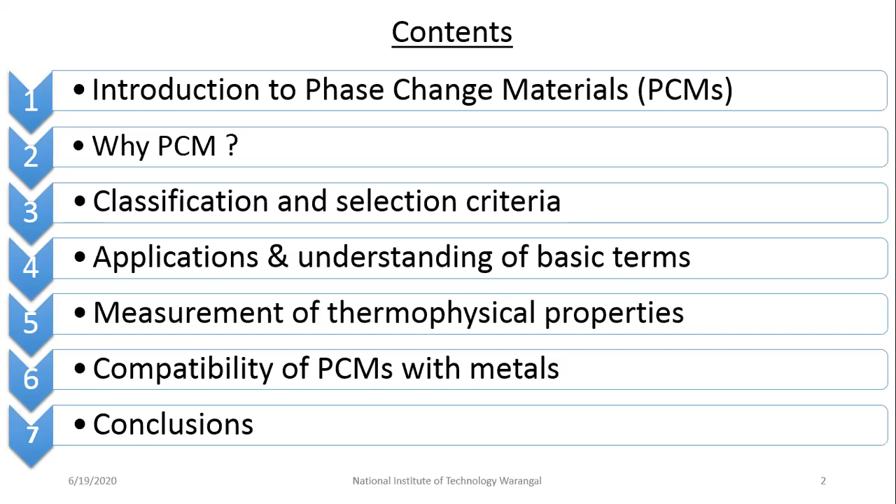If you see what phase change materials are, the name itself is the abbreviation - PCM. It is a substance which releases or absorbs sufficient energy at phase transition to provide useful heating or cooling. For example, take ice that we generally see from childhood.

If you keep ice outside at one particular temperature, initially it may take some time. Then slowly water comes out and its volume shrinks. That is our melting process. The name itself tells you - if a material is storing or releasing heat and undergoing a phase change, you can call it a phase change material.

Initially there will be sensible heat. Ice at minus 10 degrees centigrade absorbs heat from the atmosphere and changes to ice at 0 degrees centigrade. So minus 10 to 0 degrees centigrade is sensible heat, which we denote as MCP delta T.

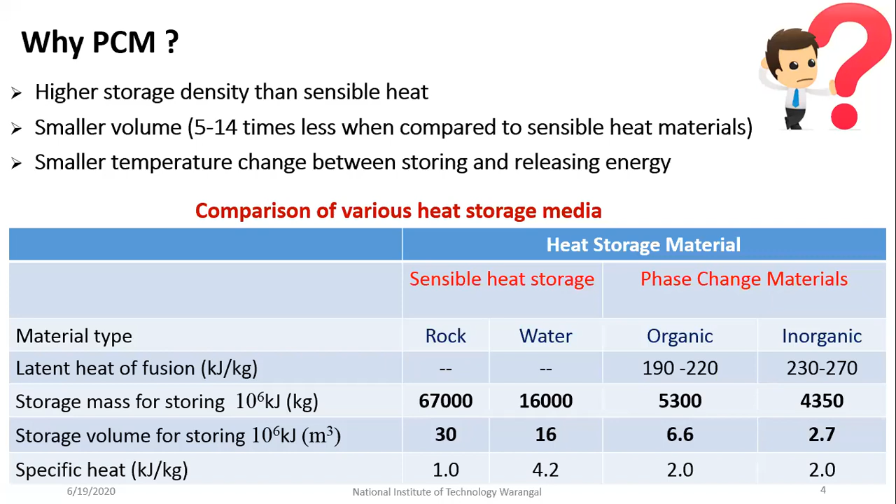If you see the basic classification of phase change materials, it is broadly classified into 4 types: gas-liquid, solid-gas, solid-liquid, and solid-solid phase change materials.

First, let's discuss solid-solid. You might be wondering, how can there be a solid-solid phase change material if no phase change is taking place? The point here is the solid phase change material changes from one crystalline structure to another crystalline structure. For example, PEG 6000, PEG 3000 - different materials exist. We call this a shape-stabilized PCM. It is not going to convert to a liquid state, but will remain in solid state. What happens is once it takes a particular amount of heat and attains the phase transformation temperature, it changes from one crystalline structure to another.

Now let's go back to the other three types: gas-liquid, solid-gas, and solid-liquid. Take water as an example: solid-liquid means water converting to ice. Gas-liquid means, for example, vapor converting to water. And solid-gas - we have several examples like naphthalene balls that we use in daily life, and camphor.

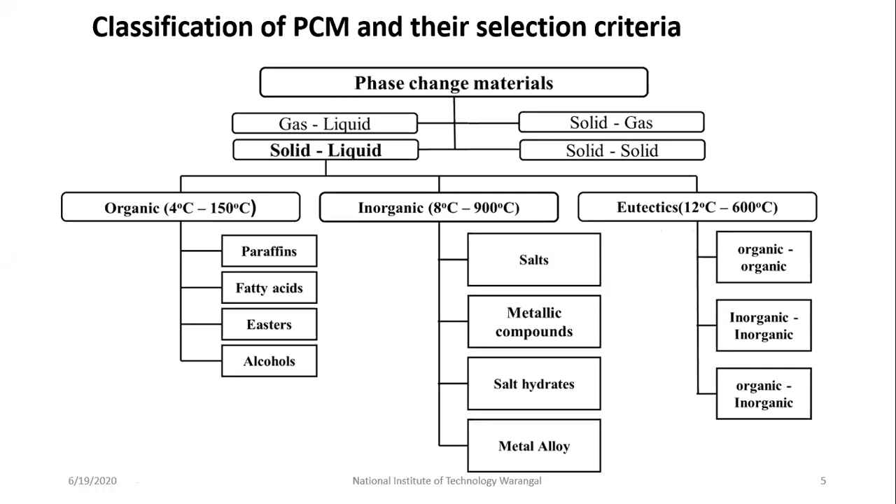Now, obviously PCMs are very promising, but there are several problems that make research difficult. So let's see their merits and demerits.

If you take organic PCMs, generally they have a wide range and good compatibility. What do I mean by compatibility? It means the PCM should be kept in some container, and it should not corrode or eat away the container material. That's what compatibility means.

It should be chemically stable, meaning its thermophysical properties should not change over time. Generally, organic PCMs have relatively high latent heat of fusion. They are also safe, non-reactive, and recyclable.

The main disadvantage of organic PCMs is low thermal conductivity. Volumetric latent heat storage capacity is also low compared to inorganic PCMs. Another problem is that at higher temperatures, some organic PCMs are flammable, and they are a little more costly compared to inorganic PCMs.

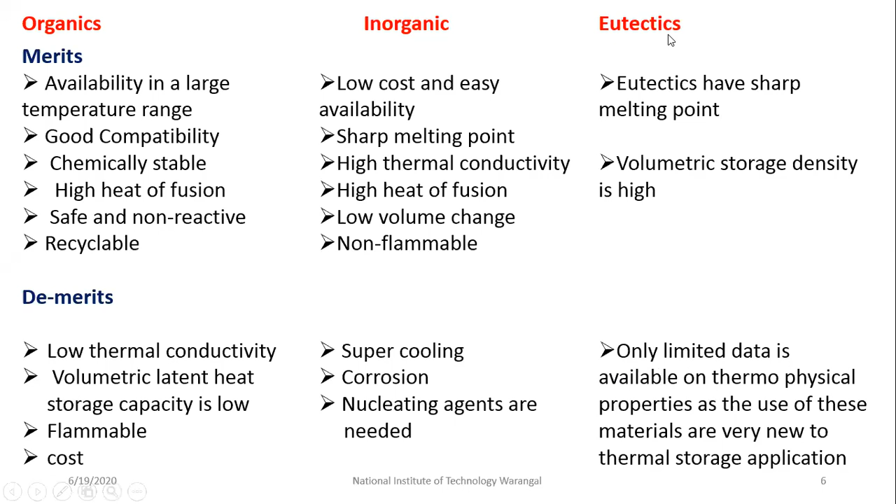So now the point is, if you just Google phase change material, you'll get hundreds of phase change materials. The question comes: what material should I take? How should I select from those hundreds of PCMs? Even review articles on phase change materials give you a huge list that keeps going on. This is one of the major confusions most researchers have when starting PCM work.

First and most important, say I have an application - I want to work on thermal management of electronics and maintain the heat sink or thermal equipment temperature around 40 degrees centigrade. So what should happen? I should select a PCM which has a melting point in that particular range, something like 35 to 38. So the first and most important property for PCM selection is that the melting point should be in the temperature range of the application.

The next most important thing is high latent heat. So you can shortlist some PCMs which have a melting point in the application temperature range.

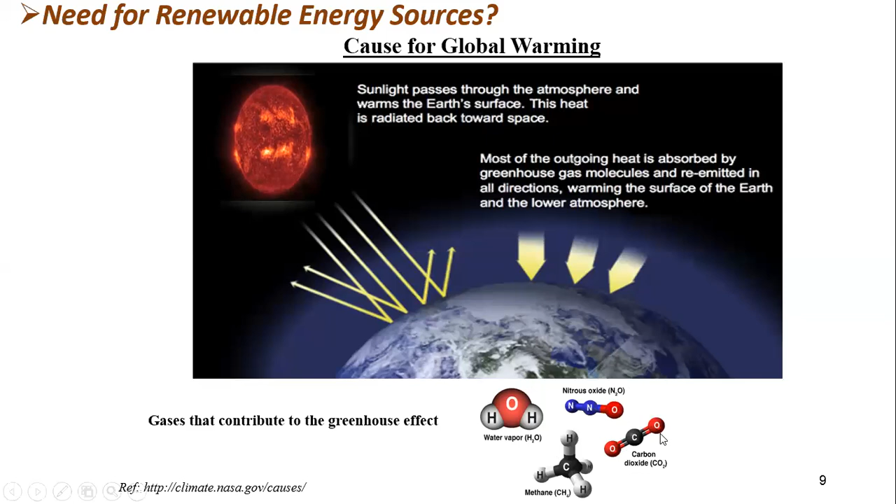One more thing is that we have so many greenhouse gases which cause global warming: methane, carbon dioxide, nitrous oxide, NOx, sulfur dioxide, and water vapor. But every time we project things only about CO2. Why? Because out of all the various greenhouse gases, carbon dioxide contributes 60% of whatever global warming we are having. That is why simply if you say greenhouse gases, we directly project only carbon dioxide, because it contributes 60% of the greenhouse gas emissions.

The question comes: there are a few studies which mention it is a tendency of the earth itself to raise its temperature, and automatically it is a cycle, this temperature will come down. But researchers have done some study and tried to relate the CO2 level that we are having in our atmosphere versus temperature. The temperature of the earth is increasing, and based on this only, people could conclude that because of the CO2 rise, meaning the ppm level of CO2 increase, the temperature is getting increased. So this is one of the proofs.

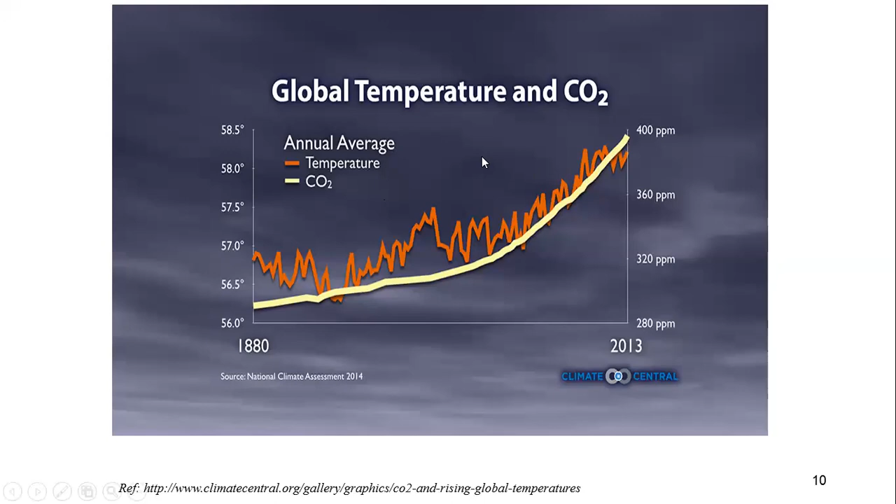So now the question is, why don't we go for other renewable energy sources that we have? Why only solar? If you see some facts, the annual solar energy reaching the earth is around 1.5 into 10 power 18 kilowatt hours.

Based upon this energy consumption data—actually this is old, but I was not having any reliable data, that is why I kept it just to have some comparison—we require around 1.5 into 10 power 14 kilowatt hours. So if you compare this, if you are able to tap 0.1% of the incoming solar radiation, that will satisfy our needs. Maybe presently it can be slightly higher, maybe let us take some 0.2% or 0.3%.

But whatever energy is released by the sun, not everything falls on the earth. Because of reflection and absorption by the atmosphere, the solar irradiation falling on the earth under ideal conditions is around approximately 1 kilowatt per meter square.

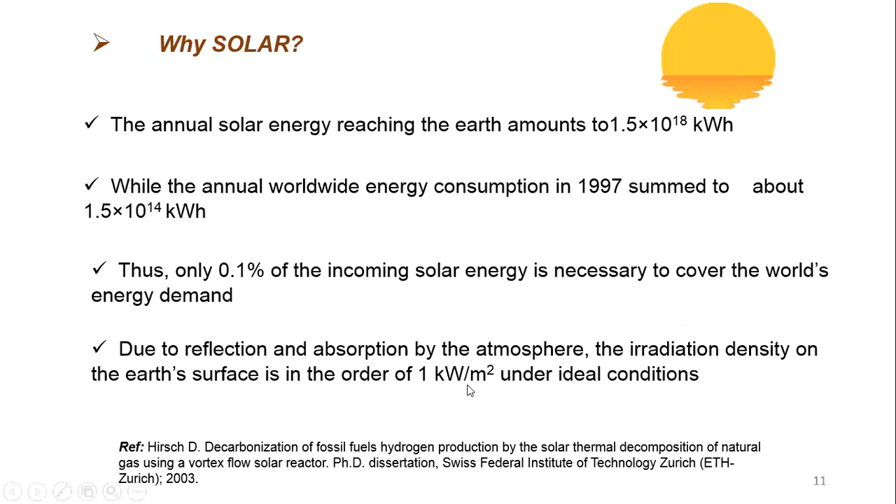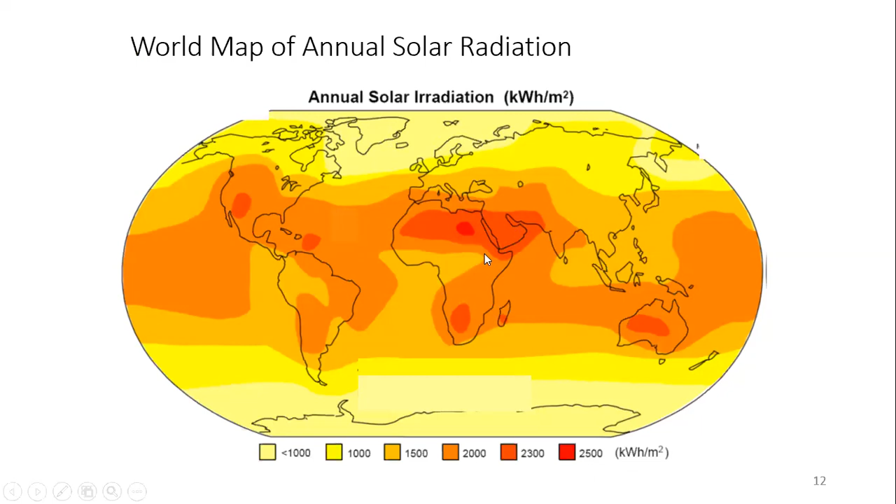Now if you see this solar radiation map, this is annual solar radiation data. You can observe throughout the earth it is not the same. In certain locations, there is a huge amount of solar radiation available, and in certain portions it is diluted. Based upon the contours, we can approximate what its value is. If you see the Indian context, to be very frank, India is blessed with good solar radiation. We have around 300 sunny days on an average basis.

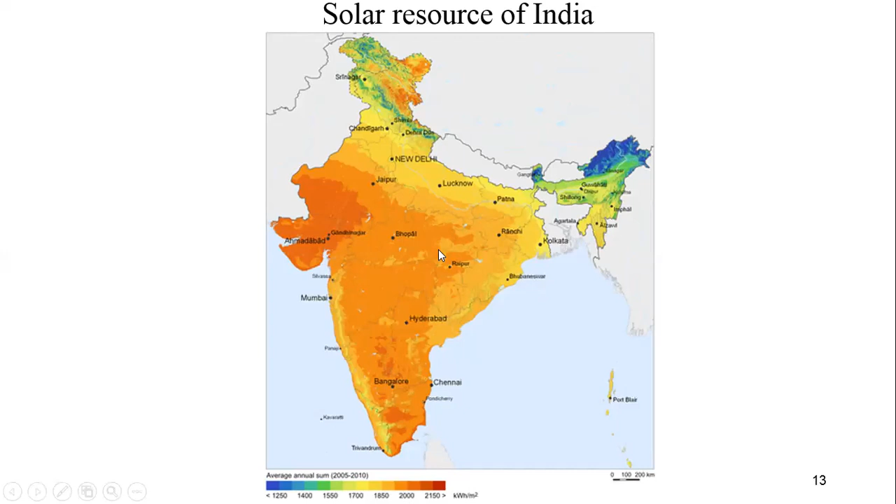So if we effectively tap this, we can reduce several emissions also. This radiation is not uniform; there is a distribution of it. Now the point is, why are we not able to effectively use this solar radiation?

The power density of solar radiation reaching the Earth's surface is low. That means whatever density you have, you cannot directly convert it to steam or directly run a turbine. So it needs to be concentrated, since it is in a diluted form.

There is also a temporal variation in whatever solar radiation we have. That means especially in monsoon, there will be several passing clouds, and there is daily variation too, right from morning to evening, and obviously depending upon the seasons it will change. One more difficulty is if you take somewhere in Europe, you can hardly get solar radiation. So throughout the Earth, you have unequal distribution on the Earth's surface.

So how to overcome this? There comes the question. One thing is that as the power density is low, we can use concentrators to effectively tap it. Next, because there are temporal variations—seasonal variation, hourly variation, and so on, or due to weather conditions—we need to have a very good storage medium and conversion system.

Another thing is, especially in the Middle East and India, there is huge solar radiation, that is solar resource available. But then what about countries like those in Europe, few countries where we hardly get any radiation?

So what you do is convert that thing to some transportation fuel, like hydrogen production and so on, and supply these fuels to that particular place. That means you are effectively tapping solar energy.

Now, if you take the mean annual solar radiation of 1700 kilowatt hour per meter square and a collector efficiency of 5%, you need an area of 1100 by 1100 kilometer square. That comes to around 2.4% of the Earth's surface area and 8.1% of the total land surface area that we have.

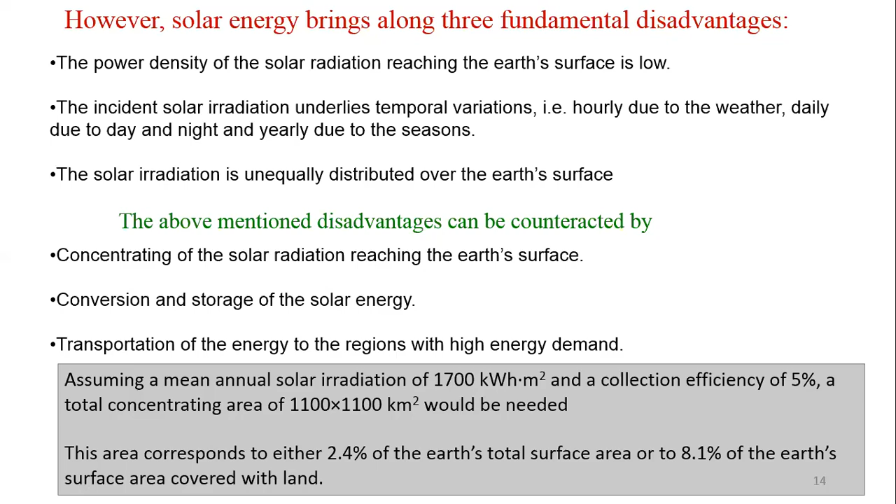So now, how can we utilize solar energy? One thing is photovoltaic panels, which make use of solar cells and directly convert to electricity, used through distribution lines and so on.

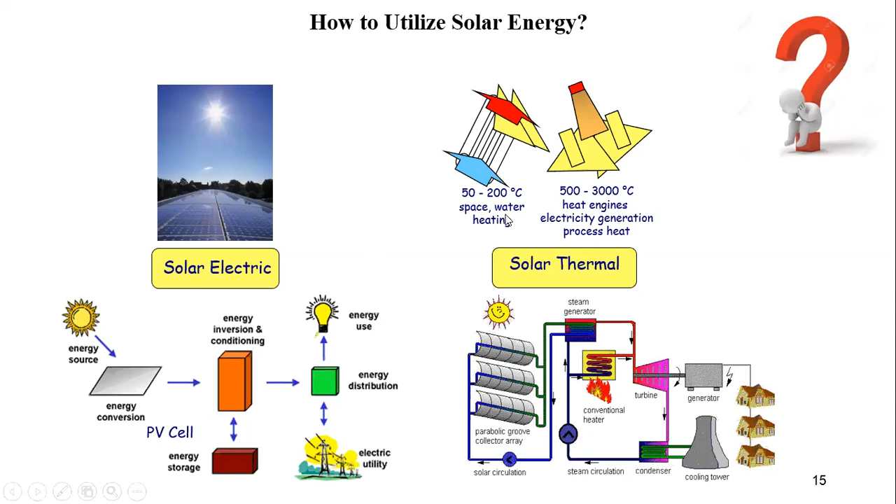Another thing is you use solar thermal devices. A lot of work and research was done especially on this, and especially for the past 2-3 years, a lot of research is being done on this solar thermal area. So we are going to concentrate on these things to understand the various thermal systems. Usually depending upon the type of device, you can have different temperatures.

One more important aspect: since we are talking about pollutants and so on, if you take most industries, 74% of the industrial energy consumption is used to meet the process heat demand, so only 26% is electrical energy. Even within this heat demand there is variation: low temperature around 22% is used, 100 to 400 degree range 16% is used, and high temperature heat around 36% is used. Why? Because if we know these things, depending upon the temperature range, we can appropriately select different types of PCMs or applications or thermal devices.

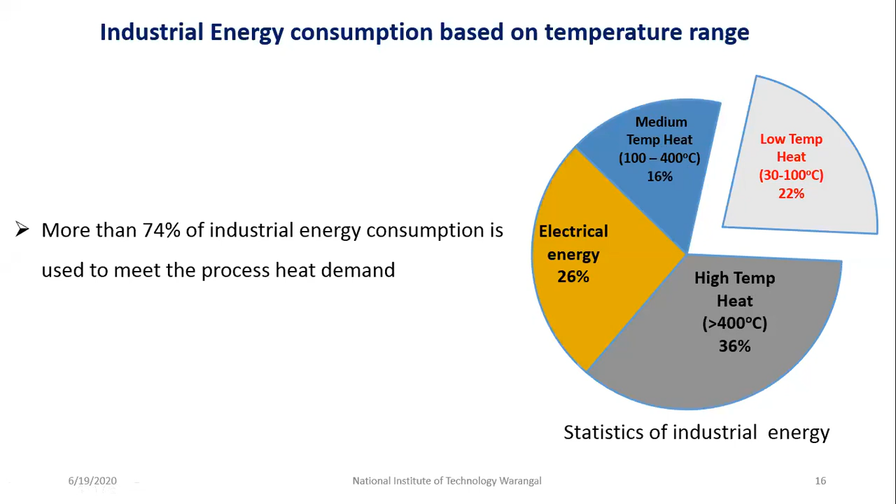So what are the various thermal devices we have? You can broadly classify them into stationary, single axis, and biaxial tracking systems. There is one more thing called the concentration ratio, defined as the aperture area divided by the receiver area. It is also called the geometrical concentration ratio, and you can also call it suns, or number of suns.

If you take the flat plate collector that we have in our water heating system, its concentration ratio is 1. The average temperature you can attain with this is around 30 to 80 degrees centigrade. This understanding is very important for selecting any PCM or application.

If you take the evacuated tube collector, because we are reducing convection loss, you can attain relatively high temperatures. And this is a compound parabolic collector—depending upon the concentration ratio, you can even attain around 300 degrees centigrade.

With the Fresnel reflector, it is in tubular form because at the focal point you have a tube where the radiation gets concentrated, and through heating oil you can tap this heat energy. With this you can attain 250 degrees centigrade.

Another thing is the parabolic trough collector, which we can also call a line focusing collector. You can attain nearly 300 degrees centigrade with this.

Then you have the parabolic dish, which is a biaxial tracking system. Here the concentration ratio can be increased. Obviously, once the concentration ratio is increased, the complexity and cost for the structure and everything increases. You can attain nearly 500 degrees centigrade with this.

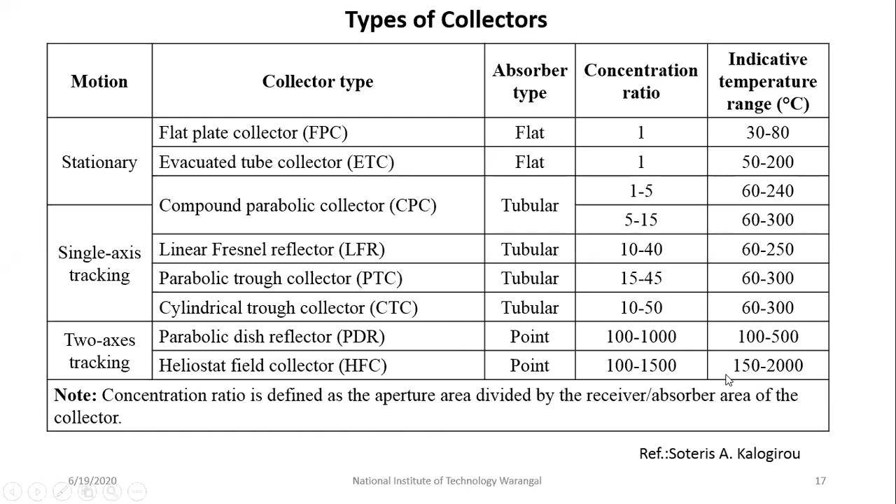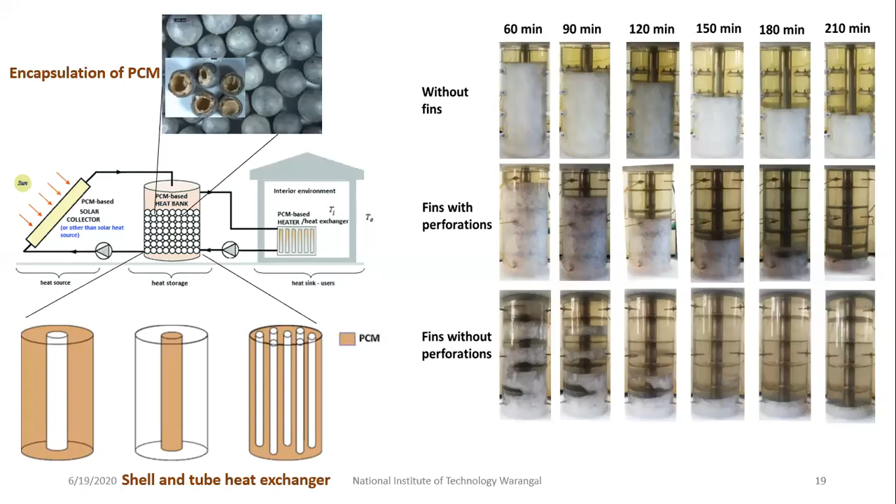So now the question is, I want to use PCM. This is one of the papers which I published in Journal of Energy Storage. This will help you a lot. For any PCM, melting point and latent heat are there.

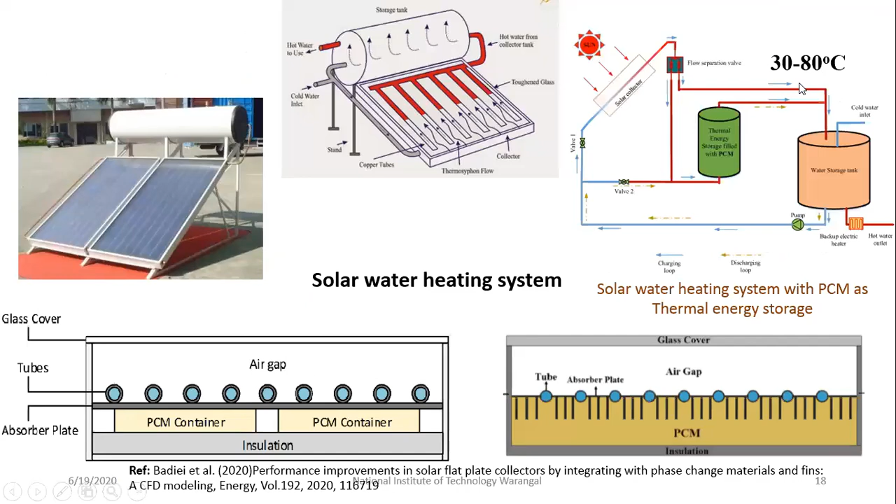I want to work on a solar water heating system. My operating temperature range is 30 to 80 degrees centigrade. So what should I do? I can select, in that 30 to 80 degrees centigrade range, any promising PCM. Whatever I have given here is a very small list.

These are organic PCMs, and on the right side are inorganic PCMs. Depending upon that, you need to first shortlist which PCM has a melting point in that application temperature range, and among these, which PCM has the highest latent heat. In the same way, you need to shortlist here as well as here, and then we can select one PCM. If you just see the literature, you will find several hundreds of PCMs. This is one important approach we need to follow during the selection of a PCM.

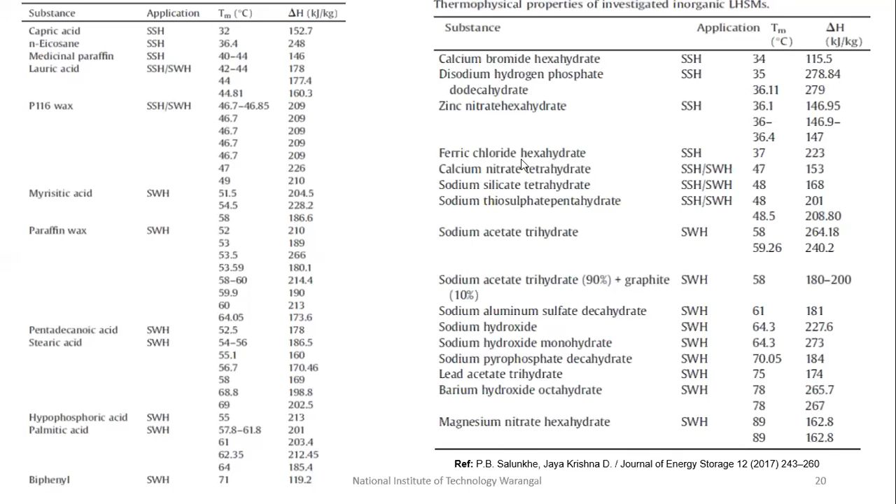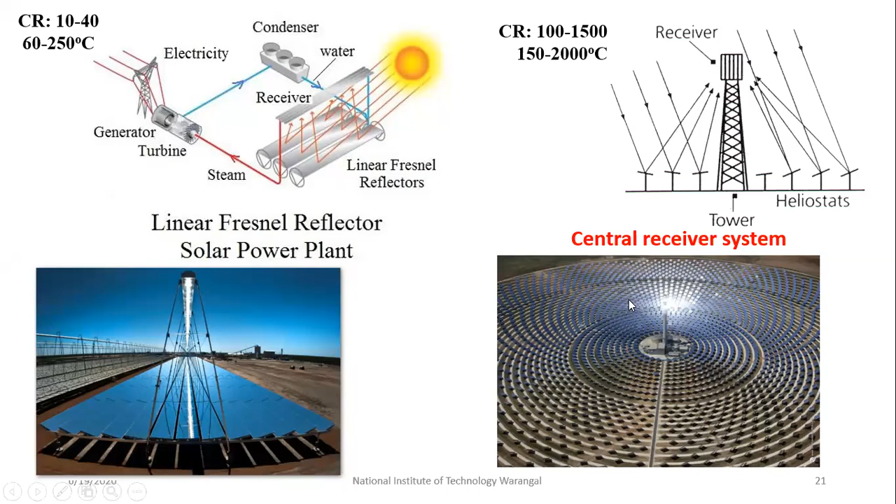So usually this is where we can have these phase change materials or thermal energy storage systems. You have the heliostat, as shown here, and a central receiver system where all the radiation gets focused. You have different loops available, and at one particular section, you will have PCM.

Usually for very high temperatures or power generation, you need to make use of salt hydrates, because salt hydrates generally have very high temperatures, so that is why we generally prefer this one. Now, the rest of the system can be a Brayton cycle or a Rankine cycle.

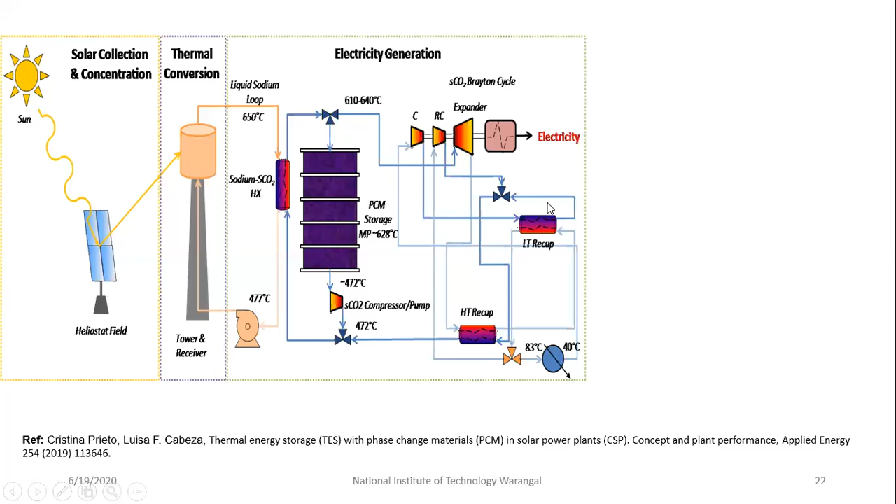If you observe, this is also taken from one of the research articles. People did use NaNO3 and different combinations of salt hydrates as given here, and the melting point is also different here. So for whatever power plant, depending upon what concentration ratio we have and what temperatures we can attain, we need to go for the material selection.

Just like material selection, we need high latent heat values, and the thermal conductivity also should be as high as possible. Density should be as high as possible. Viscosity, which will affect the heat transfer - if the viscosity is very high, then the heat transfer will come down, because the melting process can slow down. Why? Because high viscosity means convective strength will come down. So all these aspects should be taken care of.

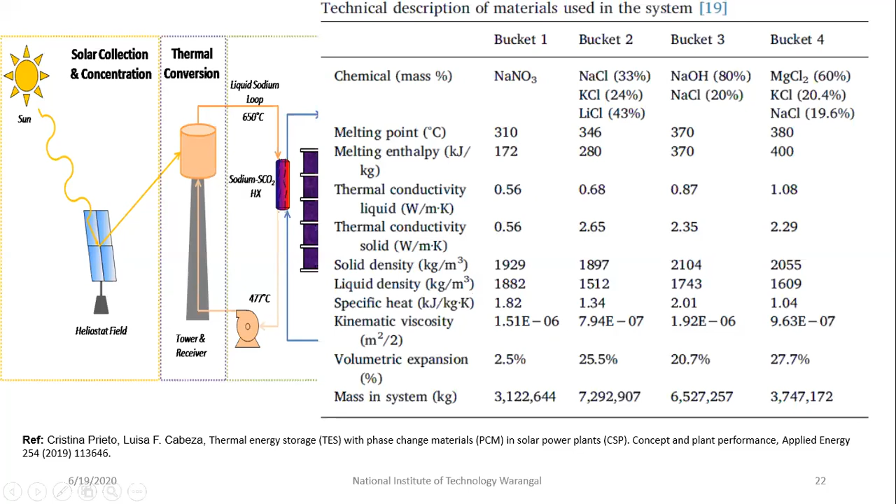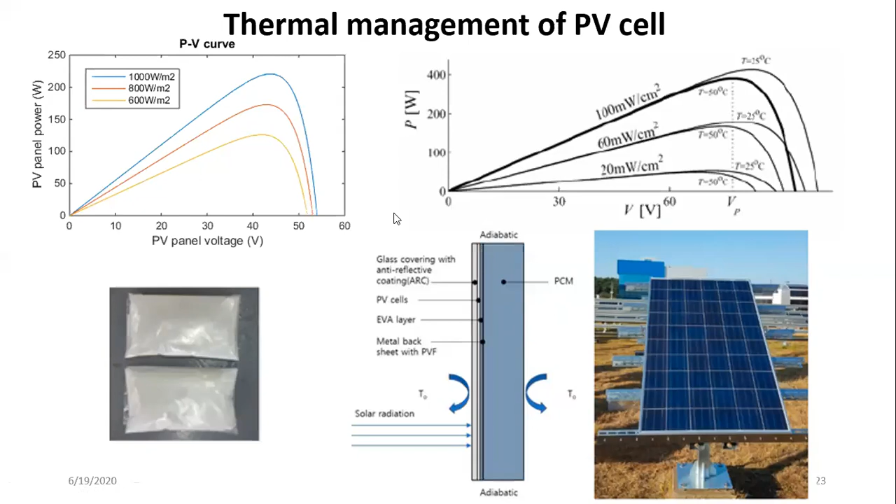Generally, what people did is they used sachets and tried to place them at the back portion, and obviously you need some other cooling mechanism also to effectively dissipate heat. This is one area people are working on, and if you Google thermal management of a photovoltaic cell, you can get a lot of research articles on this.

Now, this PCM is being used in huge medical applications as well - there is something called hyperthermia and hypothermia. Traditionally we follow this: we have neck pain, shoulder pain, or something, we take a cloth, heat it in water, and once it attains a particular temperature, we keep it on the shoulder so that the blood circulation improves. Commercially also these things are available - there is something called heat packs and cool packs.

First we need to know what hyperthermia and hypothermia are. Generally, our normal body temperature is around 97 to 99 degrees Fahrenheit. Hyperthermia refers to a group of heat related conditions characterized by an abnormally high body temperature. Our core temperature should be optimally maintained, and once the temperature increases beyond 40 degrees C or 104 degrees Fahrenheit, it undergoes severe hyperthermia. There are several health effects also when the temperature increases, and people can die because of that.

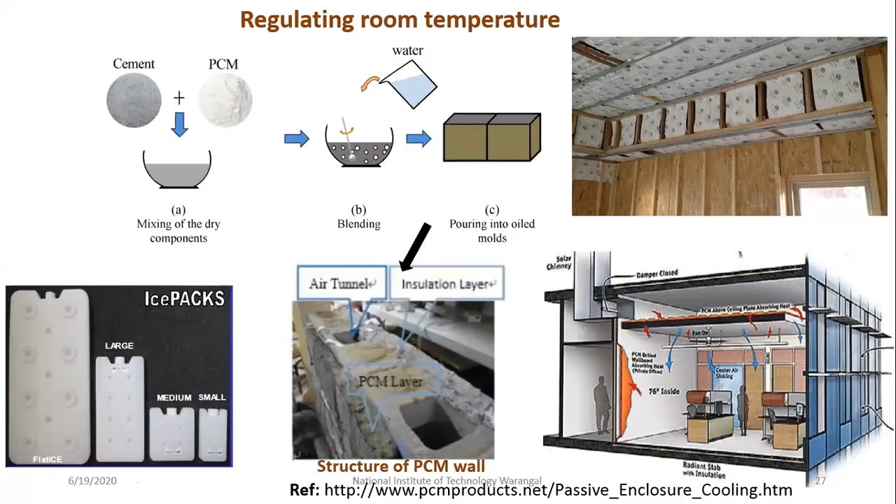The next example is thermal management of electronic components. Usually, if you take a processor like an i7 5960X with wattage around 140 watts, there is something called operating temperature range and critical temperature range.

Generally, we prefer our heat processor or thermal equipment to be maintained at the operating temperature range. But once it crosses the critical temperature range, it will actually get spoiled or damaged. For example, we have an operating temperature range of 66.8 to 72.

Once the processor attains a particular temperature, the PCM takes out the heat because the latent heat is very high. It can regulate the temperature of the processor at that particular point.

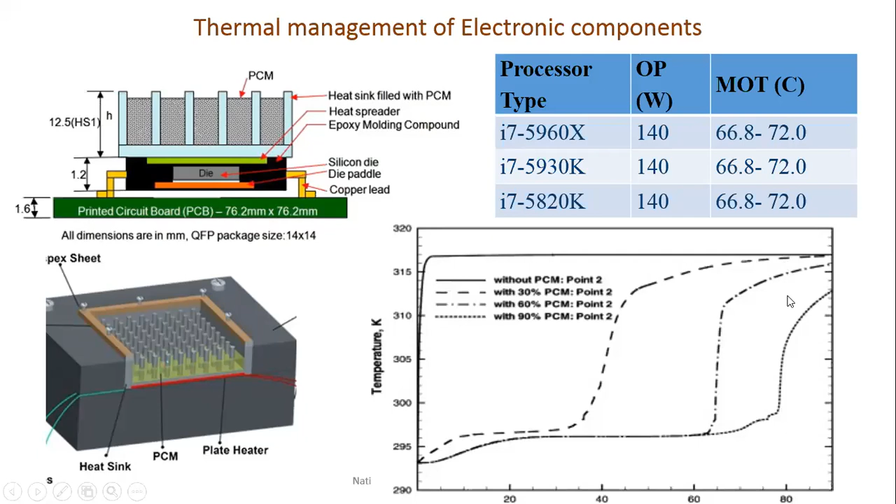Another application is PCM cooling fabric. I tried to find a site where we can buy these things, and this is commercially available, I think from a China-based website. It's coined the Bodycool Pro. Usually what happens is you have a jacket, and inside the...

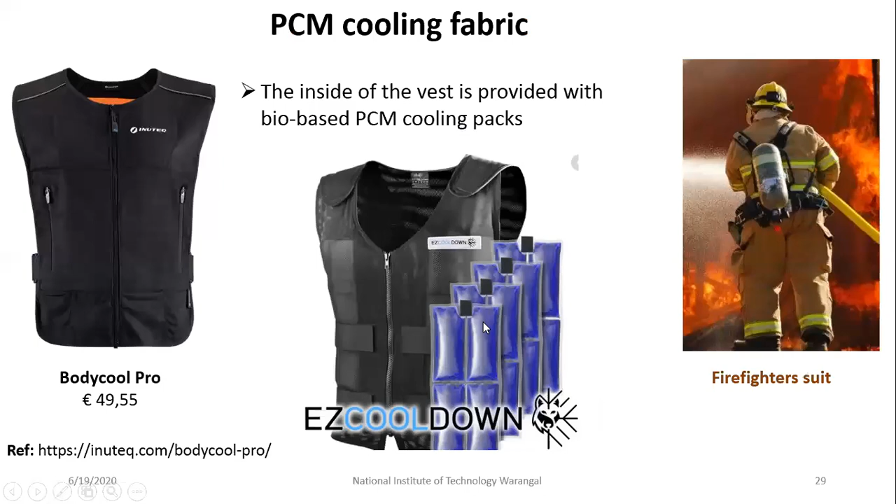Food stuff and so on will have some metabolic activity, and there will be heat leak to the refrigerator, since we can't have 100% insulation. When we open and close it too, heat leak will occur. So the hot air at the bottom, being less dense, will go up and come in contact with the PCM. This PCM gets liquefied and becomes denser, and gets circulated. This is how, even if power is lost, we can still maintain low temperatures inside refrigerators.

Especially what I heard is recently LG has this kind of system where they use PCM on the walls, especially on the back side, in different manners, so that even if power is lost, lower temperatures can be maintained for a very long time. This is also used in deep freezers, where adjacent to the evaporating coil, this encapsulated PCM is maintained.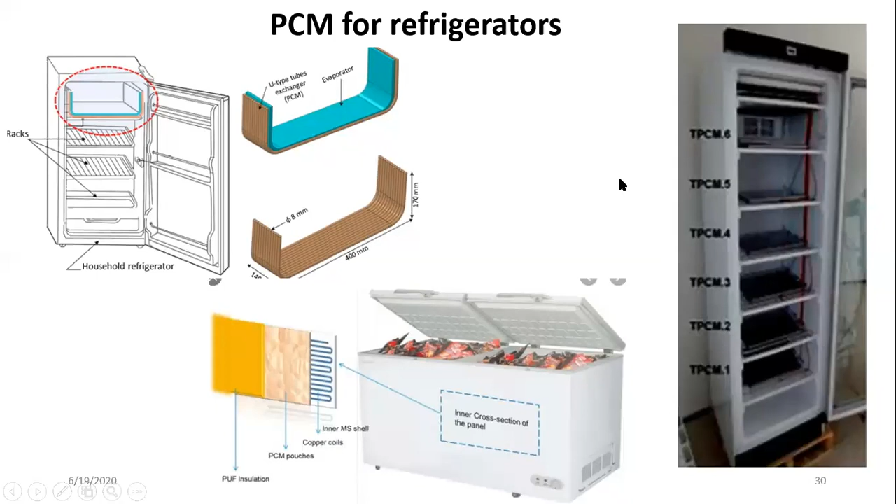Another application is PCM cold cars, generally seen in milk vans and so on. Especially in summer, there is huge wastage and spoilage of milk, because sometimes there is a problem with the truck or the functioning of the refrigerating unit due to surrounding conditions. These PCMs are observed to be very promising for this.

So these PCMs were encapsulated in this particular way. This is a cabin where we place the trays, and in these trays the milk and everything will be placed. You can see this particular portion here is also PCM, encapsulated, macro encapsulated. So this work is also there, and a lot of work is being done on this as well.

People are trying to come up with different PCMs so that the loss is minimized and it can keep it at the regulated temperatures for a very long duration.

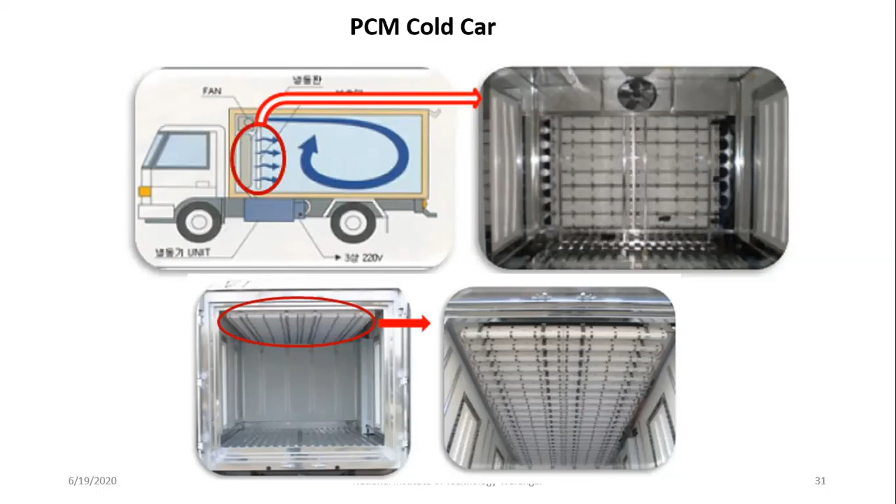Coming back to this, after applications I did discuss selection criteria, and in the previous slides I mentioned various other things I'll show you. One is congruent or incongruent melting and phase segregation. Phase segregation means you can distinguish the phases, which is not advisable. It should be as minimum as possible, and the PCM should be thermally stable and compatible. I'll show you how to do these studies.

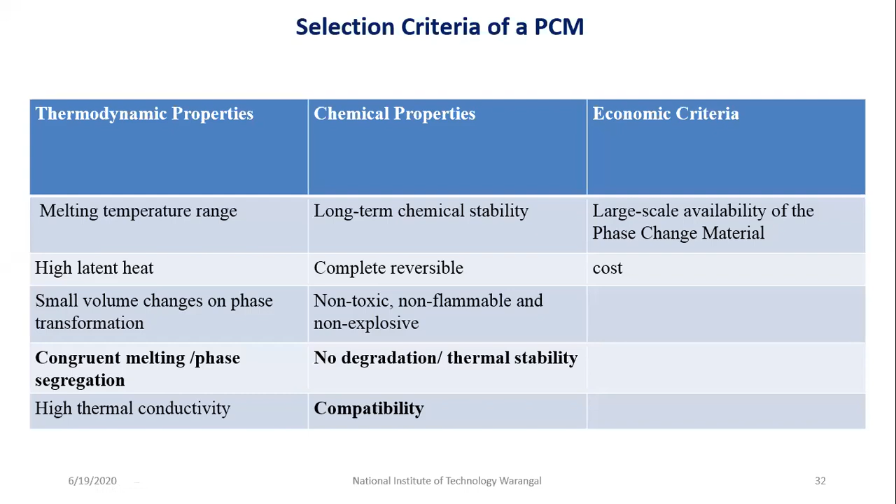Next, I'll briefly explain various equipment we can make use of to find the thermophysical properties. So first, what do you mean by compatibility? There comes the question.

Generally, if you take this shell and tube heat exchanger, inside, wherever I am pointing, the PCM is placed. The heat transfer fluid like water is circulated, and if you want to cool or heat the working fluid, it can be done. But once we keep it for a very long time, if the PCM is not compatible with the container or tube material, it will lead to corrosion. This is how corroded tubes look like.

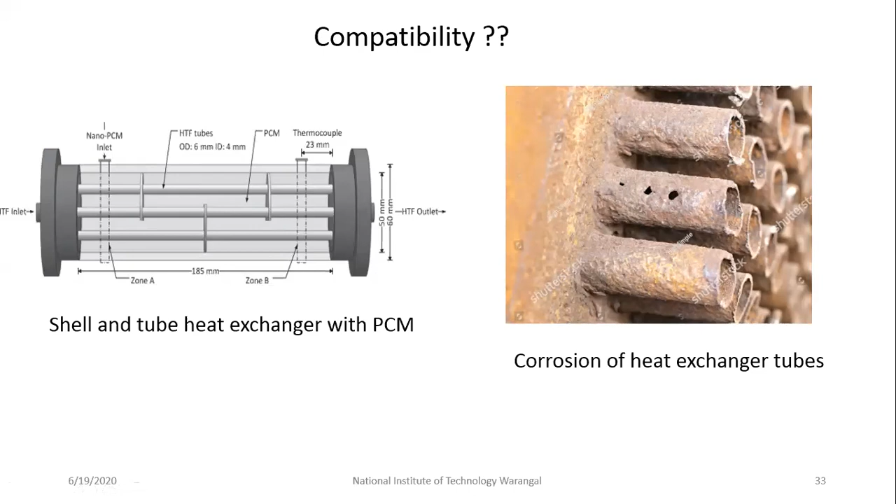There is surface corrosion, and there is also pitting corrosion. Pitting means holes will be formed. I'll discuss briefly what that means and how it happens.

So what do you mean by phase segregation? Generally, inorganic or salt hydrate PCMs undergo phase segregation, or the subcooling effect. This is usually seen with sodium acetate trihydrate, and this is work done in our lab itself.

It is kept in a high temperature water bath, which maintains a constant temperature if we place water or oil in it. This is a spherical glass ball container with sodium acetate trihydrate, a PCM whose melting point is around 45 degrees approximately. It is kept at 80 degrees centigrade for 10 hours.

You can still see certain portions only got liquefied, but other portions are still in solid phase. I hope you can visualize this. This is still solid even though it is kept for 10 hours.

Now, we tried to see by keeping it outside, that means cooling it. The room temperature was around 25 to 30 degrees centigrade. As the melting point of this PCM is around 45 degrees centigrade, it should get solidified, but when we kept it for 2 days, it did not solidify.

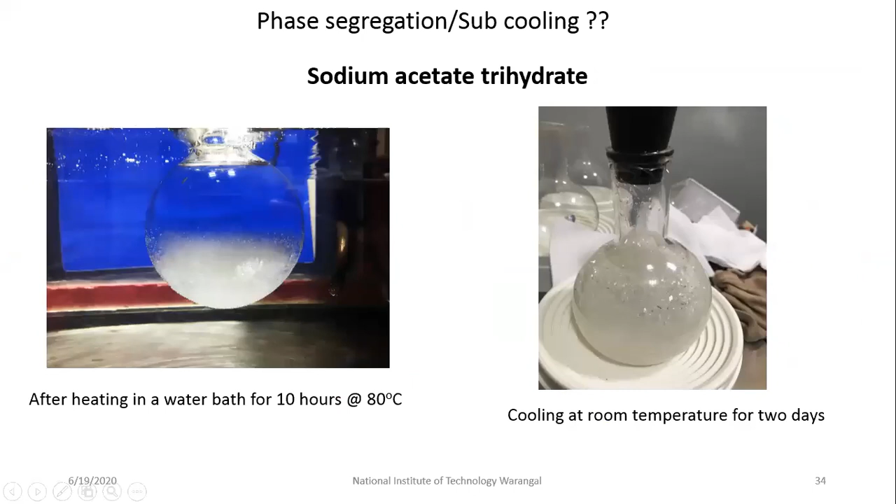What we did is place a PCM in the spherical containers, and first heated it up to 80 degrees centigrade so it totally melted. Next, we stopped the heater, and chilled water maintained nearly at 10 to 15 degrees centigrade was circulated. Like this, we heated and cooled for several thousands of cycles, with a data acquisition system recording throughout.

By using switches, we programmed the system such that this heating and cooling process takes place. So what we observed is, this is the curve at n equal to 0, that means fresh PCM. After 1000 cycles, this is what we observed. And for 1500 cycles, it is gone.

There is a change, this is for lauric acid. So what we can observe is, if you are using a PCM based thermal equipment, it will work very well during the initial days. But as days progress, there is a chance that the performance of the PCM based thermal equipment will come down. So before applying a PCM for any equipment, we have to do these thermal stability studies also.

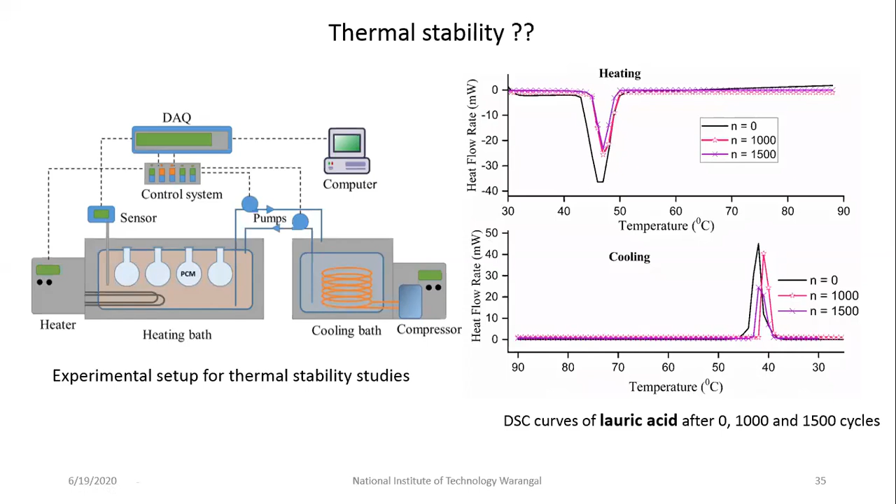You can observe, usually this portion is what we have as latent heat. So if this is coming down, whatever we have designed may not work well. So thermal studies are also very important.

Now I'll quickly go through this, basically to give some awareness on the various thermophysical properties and how to find them. So if someone is interested to do this, these things are available in IISc Bangalore. There is something called SAIF, Sophisticated Analytical Instrumentation Facility. It is there in IISc Bangalore, and a few IITs and some NITs are also available.

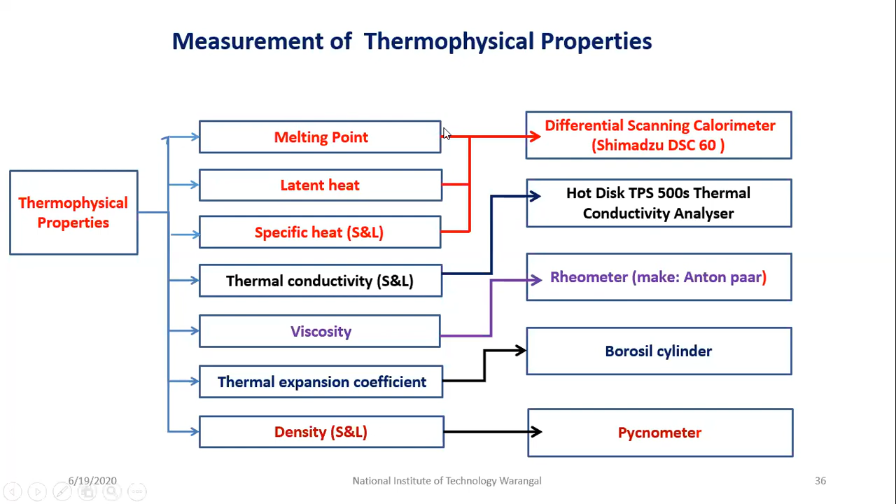So your PCM can be tested, and you can get the melting point and latent heat on a nominal basis. If it is an academic institute, they will charge relatively less. If it is a commercial company or something, the charge will be more. So this is for researchers who want to start working on PCMs, and this will give very good information.

Especially melting point, latent heat, and specific heat values, we can get through differential scanning calorimetry, called DSC in short. Usually what happens is you do heat input to the PCM, and when the phase change takes place, this 5 mg sample PCM takes the heat. That is why you get some dip like this.

This is actually called onset temperature. If you want a PCM with a very sharp melting point, the width of this particular portion should be minimum. If it is becoming more, with more difference between this end and this end, that means we don't have a PCM with a very sharp melting point. So here the melting started and it got ended here.

And the area under this particular curve will give you the latent heat. Once we do DSC, they will give this curve to us, and some software is available so we can get this data. Here I have given a few things, we will get this data also.

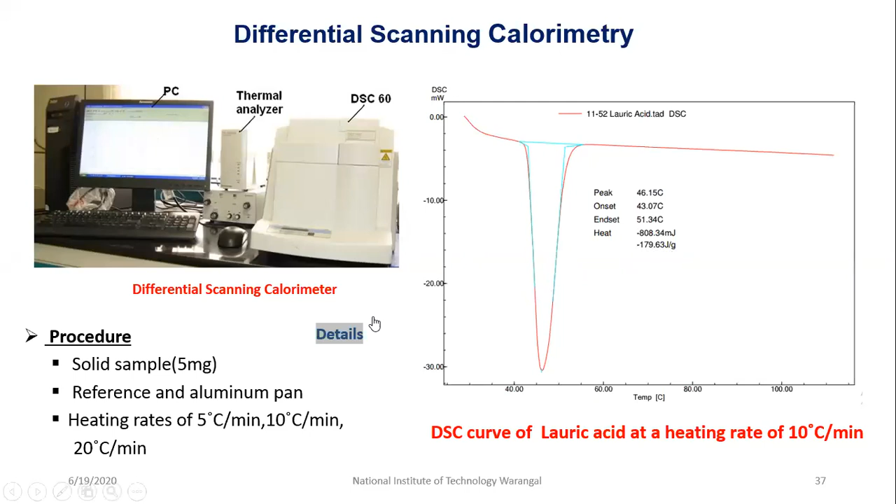In the same way, you can get the specific heat also. Some DSC equipment have inbuilt software for the CP value, or we need to do a separate experiment for this. So from this itself, we can get the CP value for solid and liquid states.

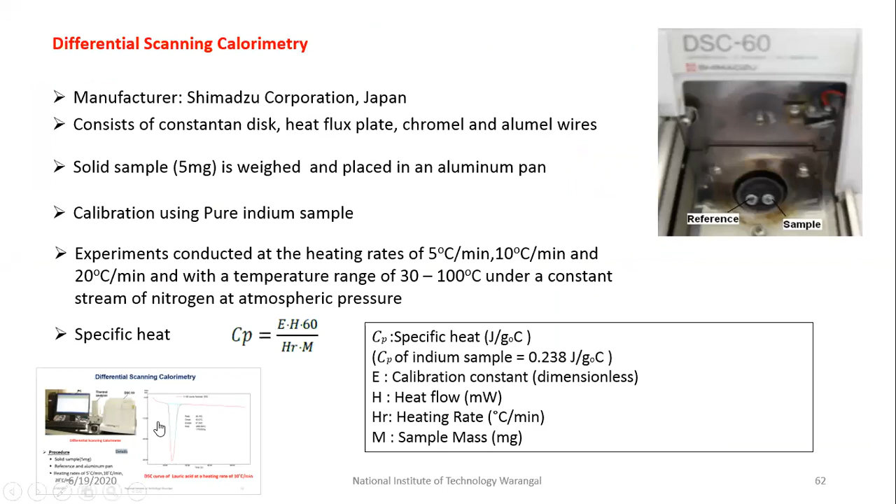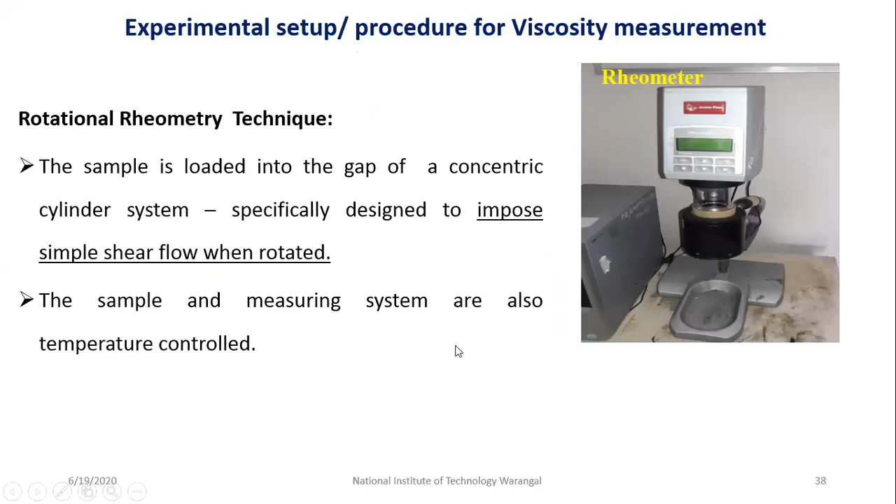Now, this is nothing but a viscometer. Usually, this is not specifically designed for PCMs. It has two concentric cylinders. In the annulus, we generally place this PCM, and one of the cylinders will be heated, because of which it gets melted. Now, one of the cylinders gets rotated, and whatever shear stress we have, depending upon that, this viscosity is calculated. This is one method by which we can get the viscosity value.

Now, for density of solid, this is one method where we can use a pycnometer. A pycnometer is nothing but a Borosilicate cylinder, usually 25 ml. N-dodecane is used for this because it does not mix with the PCMs.

Initially, the empty pycnometer is weighed. Then we add dodecane and weigh it again. Then we add PCM. Since dodecane does not mix with PCM, based on the volume change we can get the volume, and based upon this we can get the density. So one of the methods we can use is the pycnometer.

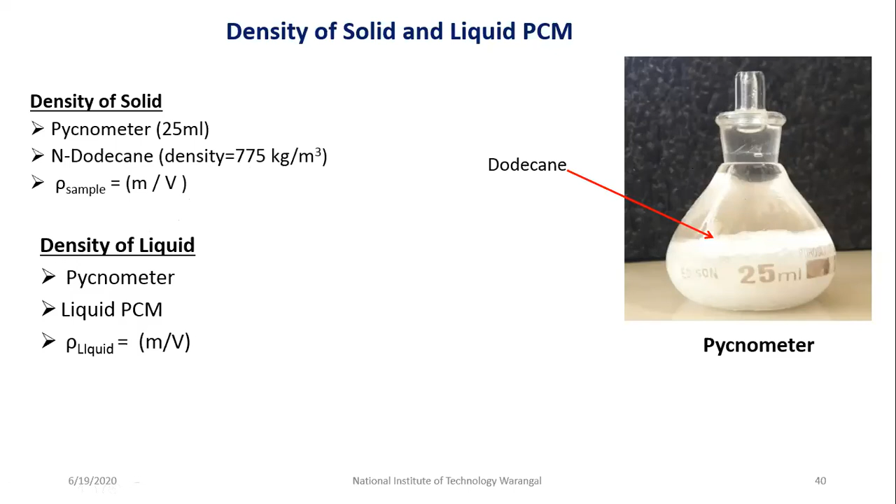Thermal expansion coefficient is also very important, because there is a density difference between the solid state and liquid state. If we place a PCM in solid state and heat is given, it should convert to liquid phase. But if the thermal expansion coefficient is very high, there is a chance the heat exchanger may burst, or because the volume is increasing, there is no space for that volume, and it may spoil.

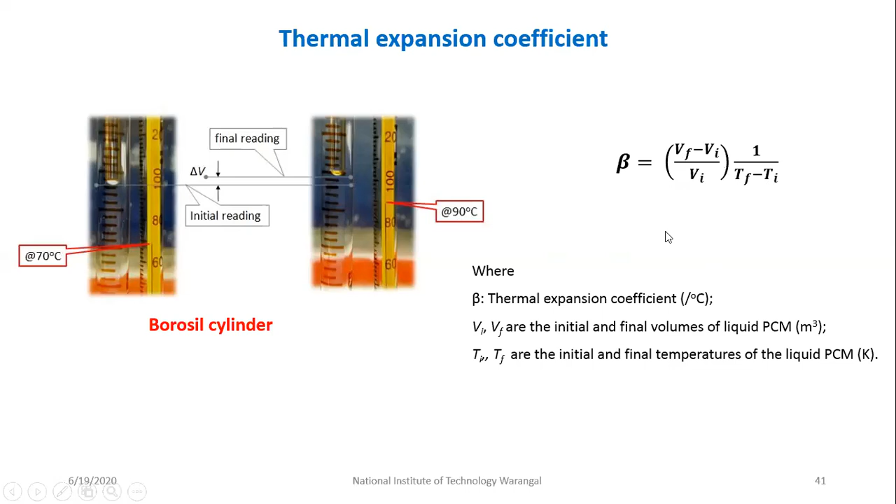So what happens is, the sample is placed in a Borosilicate cylinder and kept in a hot bath, and temperature is measured. The hot bath temperature is increased, let's say from 70 degrees centigrade to 90 degrees centigrade. Because of this change in temperature, there is a volume change. This is given as final volume minus initial volume over change in temperature, giving us the thermal expansion coefficient, which should be as minimum as possible.

Based upon this equipment, some low temperature PCM materials like lauric acid, myristic acid, stearic acid, palmitic acid, paraffin wax, and sodium acetate trihydrate were measured, and you can see all these values given here.

In the same way, if you want to use a PCM for an application, it is necessary to find the thermophysical properties of that PCM. If it is already available in literature, there might be some variation because of the change in purity values.

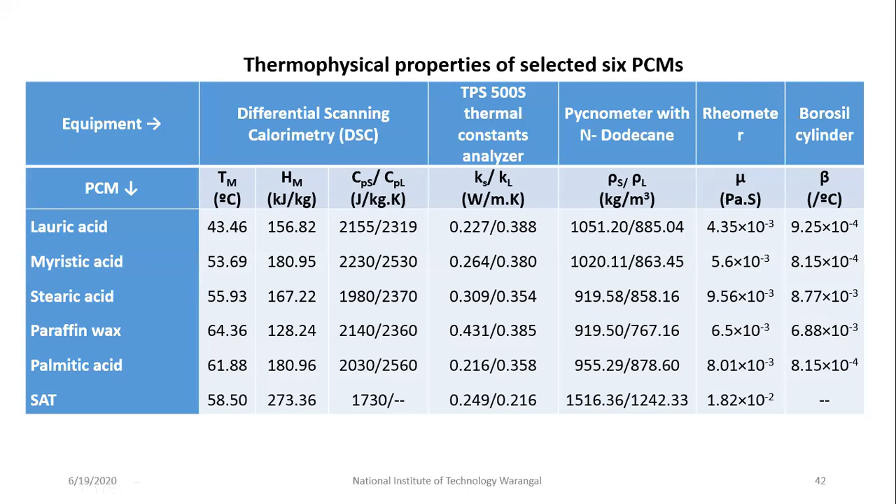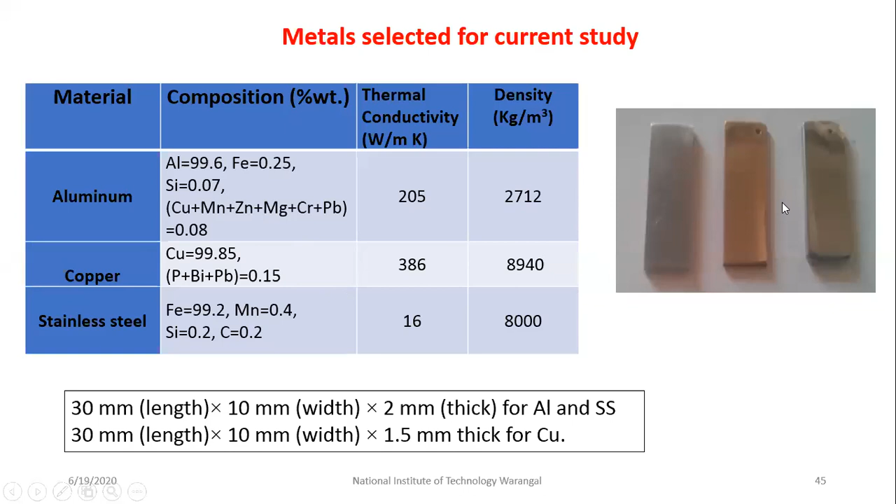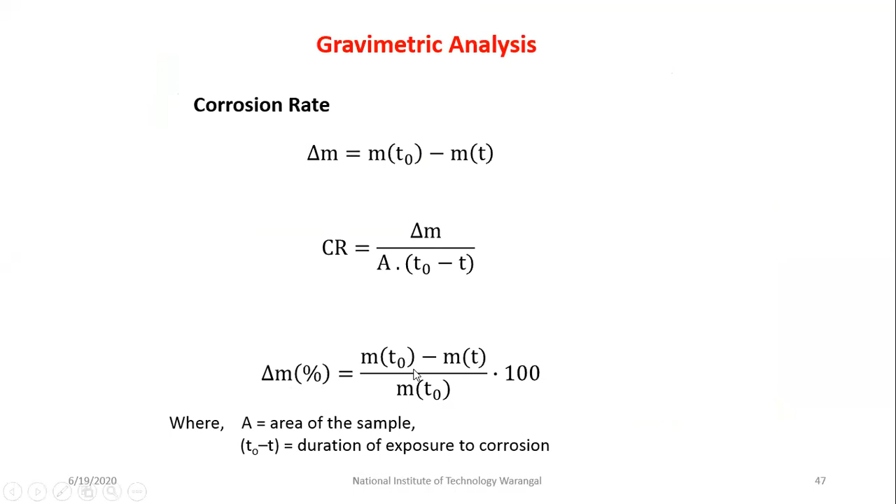Initially copper, at 80 degrees centigrade, because if you take any solar water heating system, the average temperature will be around room temperature to about 80 degrees centigrade. So we try to see what is the corrosion rate, and with respect to time the corrosion rate decreased. Why? Because of the formation of oxide layer on the surface. In the same way for aluminium, it is observed like with paraffin wax and other materials.

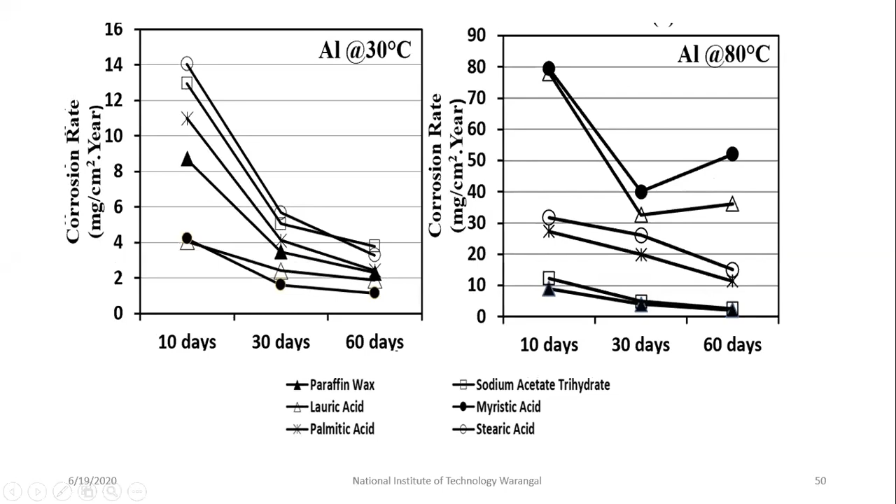But for some of them it decreased and then increased. Why? Because of pitting action. I'll show you these things in terms of pictures, SEM images. So out of copper, aluminium, and stainless steel, for stainless steel this magnitude is very, very less. So we can get this purely based upon the mass loss, and from that we can get the corrosion rate.

So in a nutshell, copper has huge corrosion, aluminum is next, and stainless steel is actually negligible. But the main problem is that stainless steel has less thermal conductivity compared to aluminum and copper. So it is good on one side and bad on the other. Especially if you are using stainless steel, we have to go for some thermal conductivity enhancement techniques. And usually at room temperature, the corrosion rate is less.

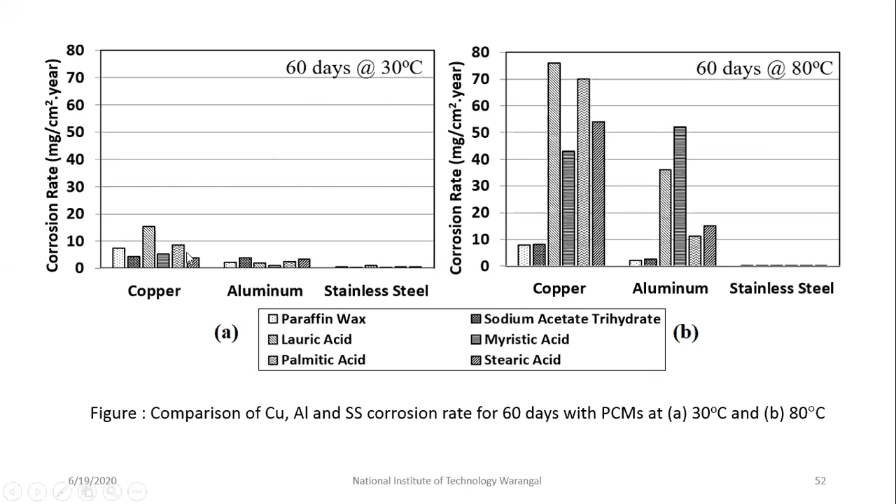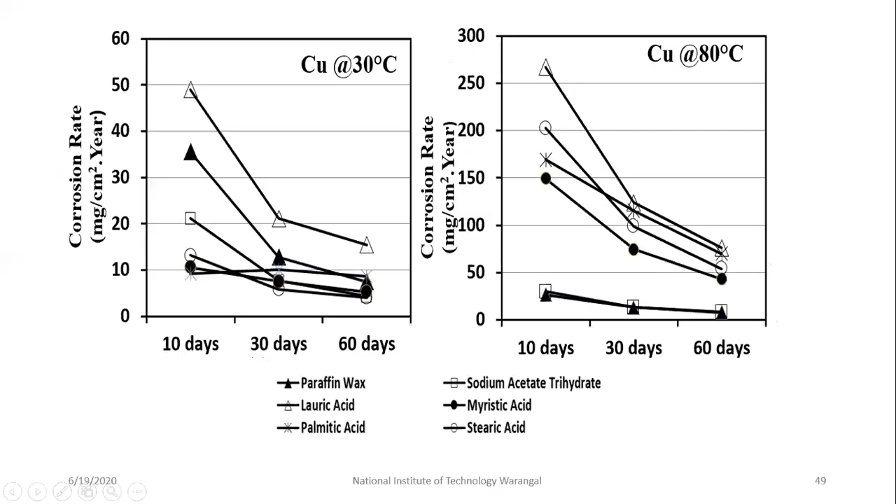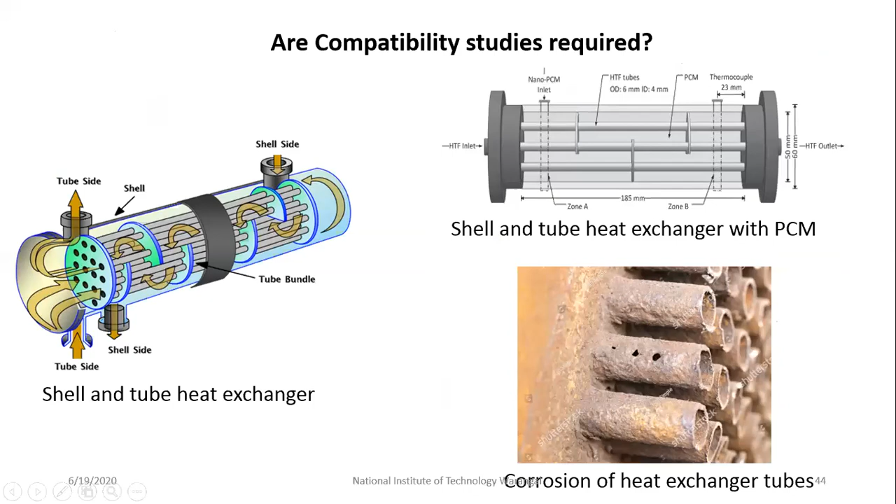Pitting is more dangerous. Why? Because if you have water or heat transfer fluid circulated through the tubes, and surrounding that tube you have PCM, the water will pass through these pits and mix with the PCM, and it will retard its properties. That means for whatever we have designed, it may not work.

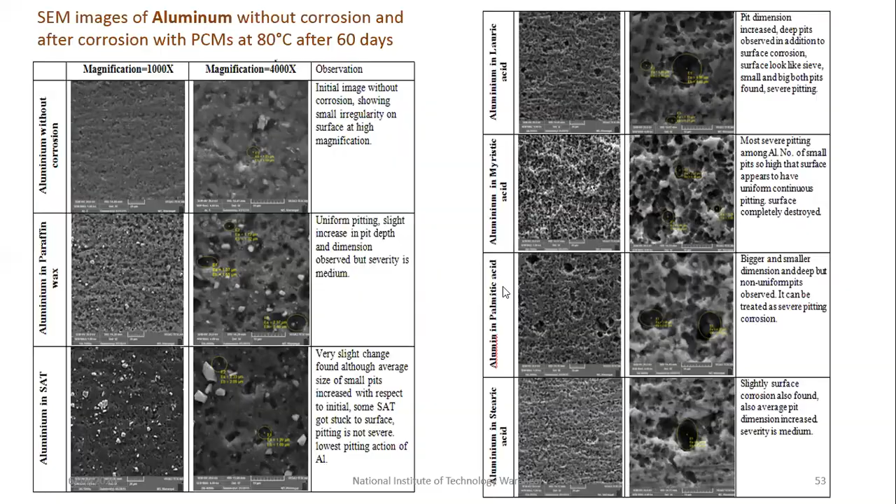But for copper, it is more like surface corrosion on the heated surface. For aluminium, it was observed that pitting corrosion was dominant. This is for stainless steel — it is almost negligible corrosion. It was observed to be very, very good.

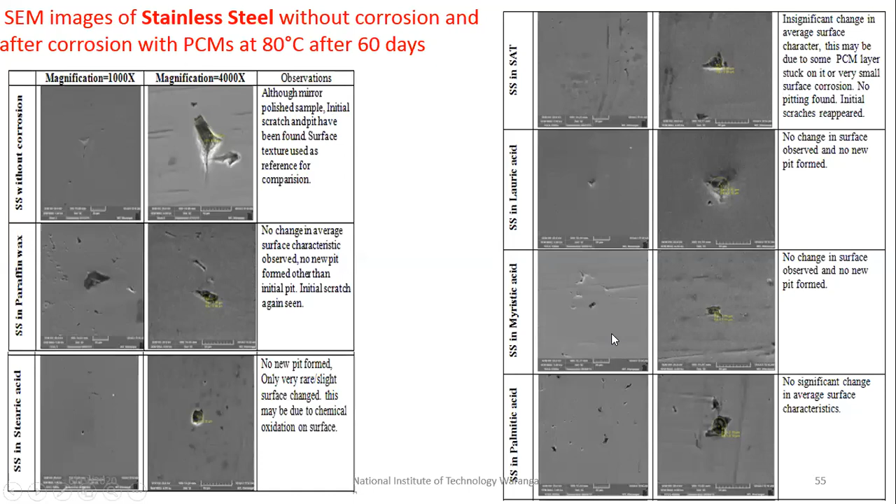Sometimes people ask me, sir, when we add this PCM with copper, our PCM color itself is getting changed. Why? Because copper reacts with some of the PCMs. So is it different, or what does that mean? Actually, because of the surface corrosion of copper, you can see here it has turned almost greenish in color.

But for some of the paraffin wax and sodium acetate, it remained the same. Especially with lauric acid and some other PCMs, the color changed to pale yellow and so on. This means corrosion is taking place, and it becomes very necessary for our understanding of why this is happening.

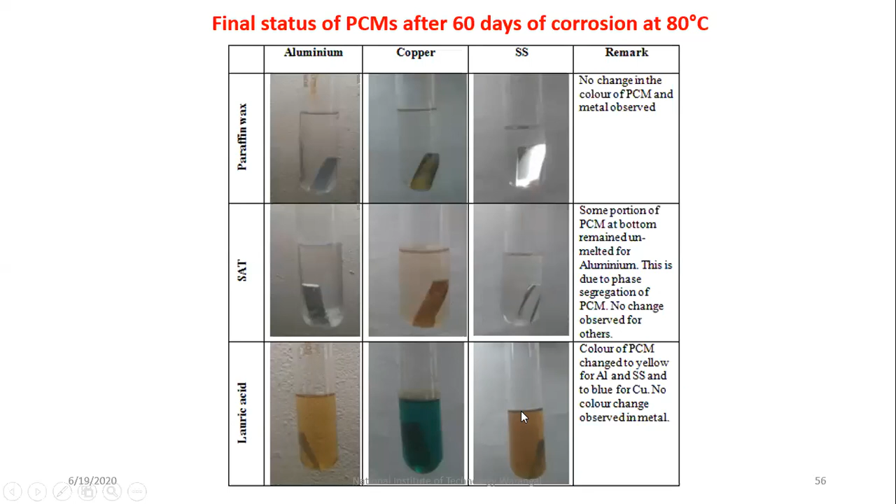Previously, according to general conclusions, we came to know that organic PCMs generally have a lower corrosion rate. But if you see, lauric acid is also an organic PCM — it comes under the fatty acid group — but still it is corroding a lot. You will see myristic acid behaves similarly.

So from a visual observation point of view and surface characteristics, it seems fine. But whether it is recommended or not, how do we know this? There is a research article, and even industrial guidelines exist on whether to use a particular metal with a particular PCM or not. People have given some guidelines.

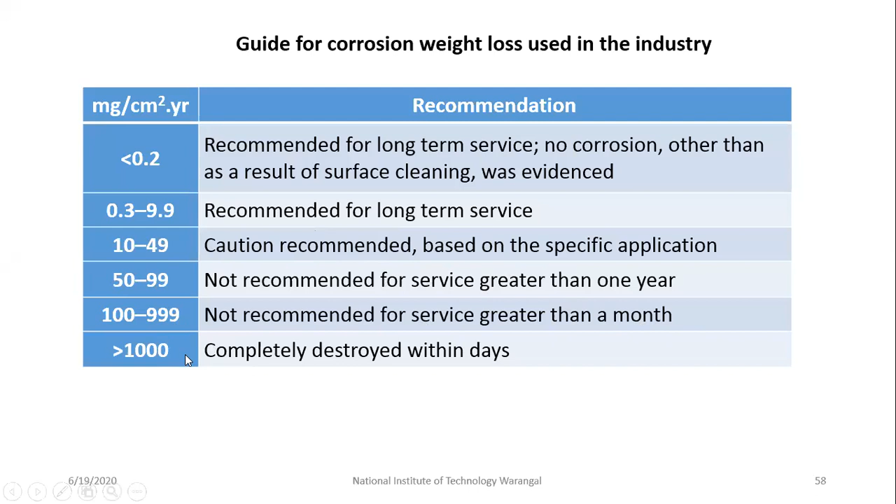If the corrosion rate is less than 0.2, you can go for long-term service. If it is between 0.3 to 9.9, it is okay, you can still go for long-term service. But if it is 10 to 49, caution is recommended — that means you need to check for maintenance at regular intervals. If it is 50 to 99, it is not recommended for more than 1 year. And if it is greater than 1000, you should not use that combination at all.

So based on our study, what we can understand is that some of the PCMs cannot be directly employed with certain metals, but most of the PCMs are compatible with stainless steel.

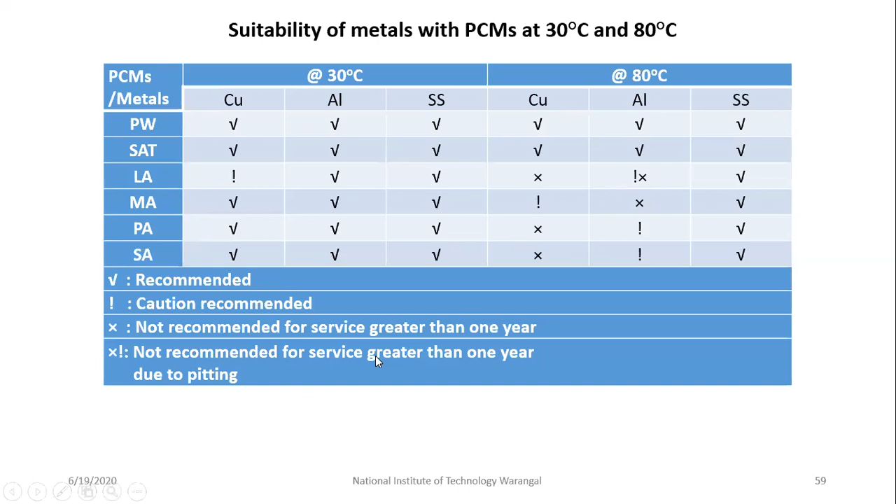So you can go with stainless steel, but obviously you need to consider thermal conductivity and other aspects. One more thing, there is a special sign here, exclamatory and cross. Actually, this corrosion rate for this particular combination for aluminum is within the limits. But based upon the SEM images, there were several pits that formed, which is not advisable at all. That is why it is not recommended for greater than 1 year, due to pitting action.

So we have come to the conclusions part. We tried to see the basics of phase change materials, what a PCM is, and various applications for it, along with thermophysical properties and other factors that we need to look into. That is what we have briefly discussed in our presentation.

Generally, due to high latent heat and nearly constant phase change temperature, PCMs can be employed in several applications to make the system more compact and efficient. This is one of the main reasons why we are using PCM. Melting point and latent heat are primary selection criteria for PCMs. Along with these, it is very necessary for us to study melting and solidification.

Why? Because we did see phase segregation, compatibility (that means corrosion), and thermal stability. As we go for more cycles, the properties of this material may change, which may finally lead to failure of the equipment. So along with these things, it is necessary for us to study these aspects for long-term and efficient usage of the thermal equipment. As we have seen from compatibility studies and basic properties of PCM, the thermal conductivity of PCMs is generally very low.

So now, because of this drawback and other promising features, a lot of work is being done on the usage of fins, metal foam - metal foam is like a porous media - nanoparticles, and so on. But there are several problems with this also. That is why this is one of the hot areas to work on.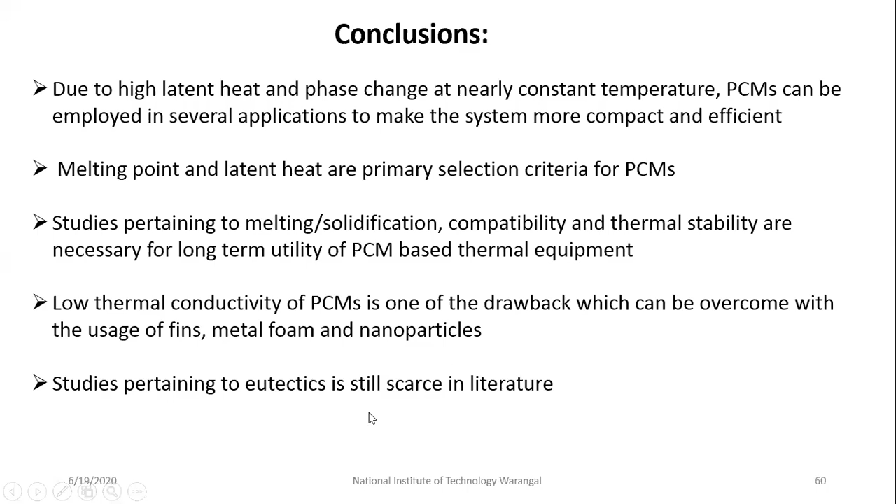And one more thing, eutectics is another area. Why? Because very little work is there. You need to go for different combinations, which is time consuming and a costly affair. A lot of insight needs to be obtained. That is why this is also one small area where you can combine different PCMs and finally come out with the most promising option.